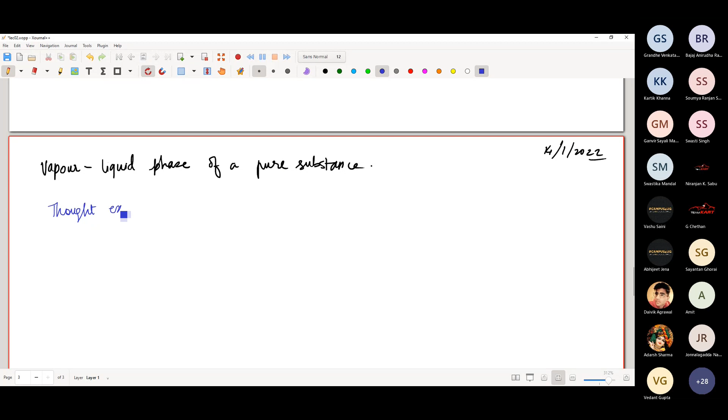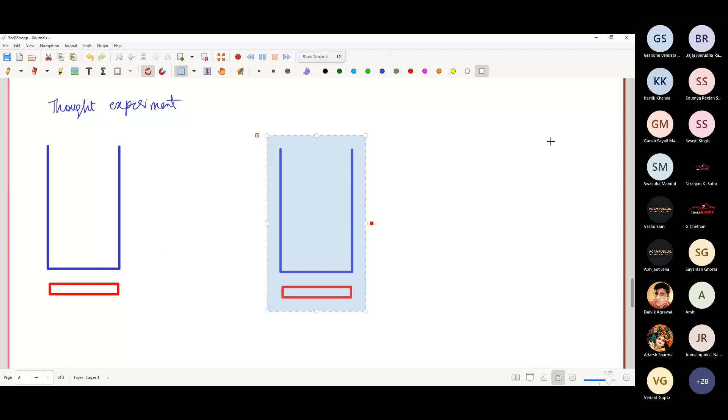All right. So the thought experiment. So let me redraw, or let me just grab hold of whatever was there. We just need the piston and cylinder. So let me grab hold of the piston and cylinder. Let me just drag it down. Just keep it ready over here. All right.

So you start off, let me just write down the states. So this is state 1, where you have water at 20 degrees Celsius. So you have water everywhere. Then you heat it. Okay. So when you heat it, you say that there is a sensible heat transfer. Sensible meaning you can sense the temperature of the water changing. And so you all know from elementary school that m Cp delta T is going to be equal to the amount of heat transferred. And that is true in this case as well.

So after heating, even when it reaches something less than the boiling point, there will be hardly any appreciable change in the volume. Slight change will be there in the volume, but nothing drastic. Okay, so after heating, suppose this is at 80 degrees Celsius. It has absorbed a certain amount of heat, and now the water is at 80 degrees Celsius. This initial volume and this volume presently will be different. This volume will be slightly larger. Why will the volume be slightly larger?

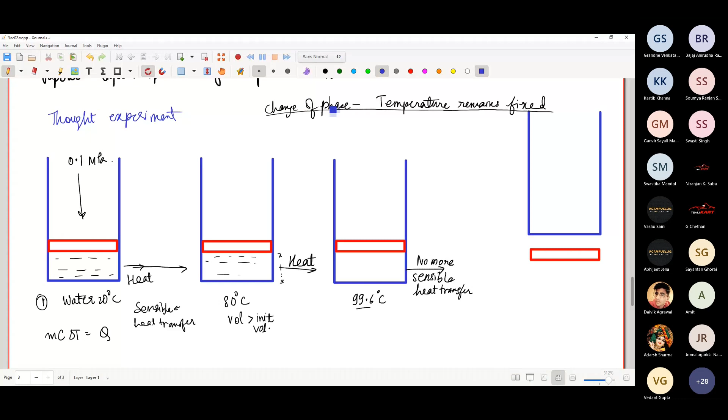This statement, is it always true? Sir, I think it will be true at the boiling point. No, that is okay. We are at the boiling point. At any phase transition, not just boiling, even for melting, this will be true. Even for sublimation, it will be true. Only for pure substance. Okay. It is true only for a pure substance.

For zeotropic mixtures or for mixtures in general, the temperature does not remain fixed. The temperature still keeps on increasing. Okay? The temperature still keeps on increasing with a different slope. I will just give you a brief idea about it later on. So there is no more sensible heat transfer. Now here it is still water. There is no vapor. So 100% water, 0% vapor.

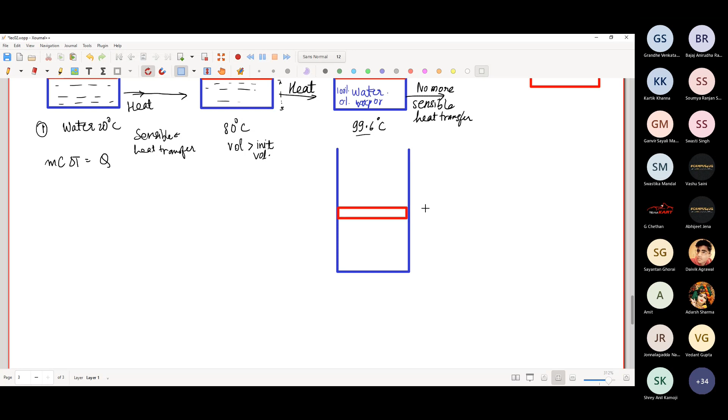Now any more heat transfer will cause what? It will cause some amount of vapor to be formed. And now the formation of vapor causes significant change in volume. Why? Because vapor has a much lower density than liquid. Rather, we say that vapor has a larger specific volume than liquid, and so any generation of vapor causes a larger change in volume.

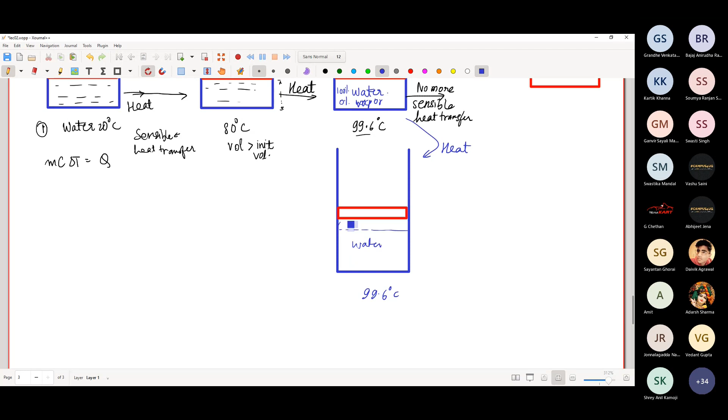So now say it is still at 99.6 degrees Celsius, still heating it. So you have water and you have some amount of vapor. You still heat it and it will stay at 99.6 degrees Celsius until what? Until the entire liquid water changes to vapor.

And so when the entire water changes to vapor, the volume will increase like this. So this is entirely vapor, but still the temperature will be 99.6 degrees Celsius. Now the last liquid drop has been converted into vapor. Now what happens when you heat? Now again the temperature will sensibly rise, meaning you are now superheating the vapor.

Okay. Any more heat addition will be tantamount to sensible heat transfer, and now you are raising the temperature of the vapor, meaning you are essentially superheating the vapor.

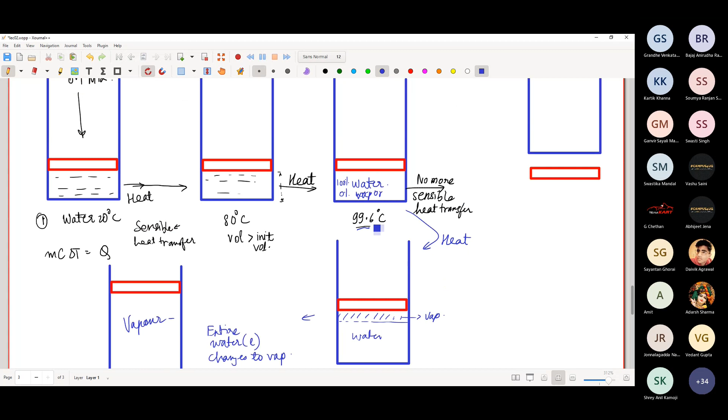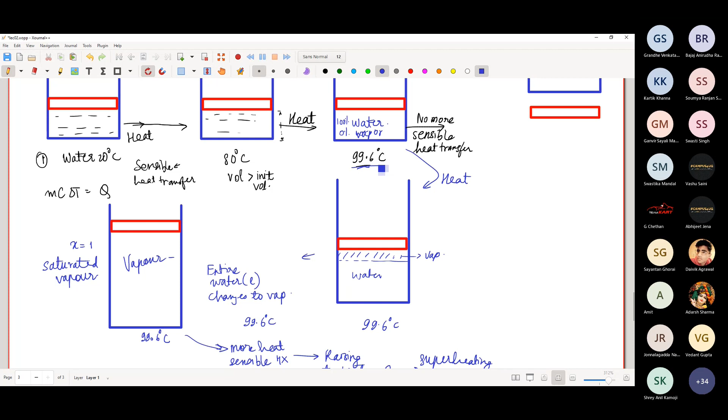All right, so this particular point, when you are at the boiling point and you have only water, is called x equal to 0 quality, and this is known as saturated liquid. And this point where you have 100% vapor is called saturated vapor. And so all the points at 99.6 degrees Celsius, that is at the boiling point, all the points throughout this process, are said to lie on the saturation curve.

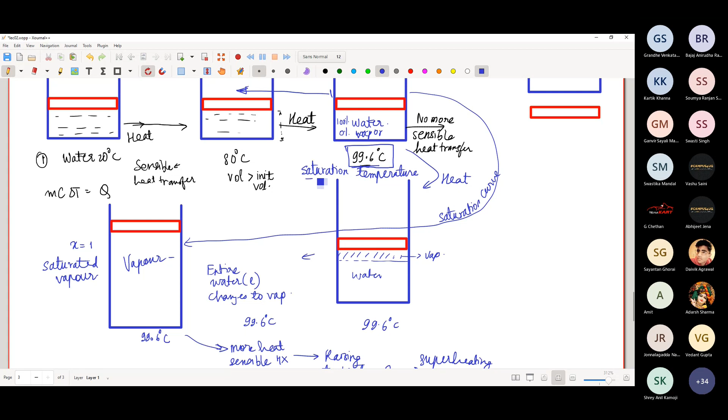Before this, we say that the water was subcooled because it is at a temperature lower than this temperature, and this temperature is correspondingly known as the saturation temperature. And this saturation temperature is at that particular pressure, and the pressure is 0.1 megapascal.

Okay, so let me redefine. So the quality X is equal to mass of vapor divided by mass of vapor plus mass of liquid. And this quality is only defined at saturation, meaning it does not make any sense for us to define the quality for fully vapor region, meaning if it is superheated vapor, then this does not make sense. It also does not make sense when you are a subcooled liquid. Any doubt so far?

So, can you not define X for superheated vapors? It will be only one, no? Yeah, so beyond that, it does not make sense. And we will come to why it does not make sense in a while. Because you have already specified it is superheated. Suppose someone says, tell me the quality of superheated steam. You should immediately say that since it is superheated, I know that it has gone beyond its saturation temperature. So it obviously is not in saturation anymore. So I should not define it.

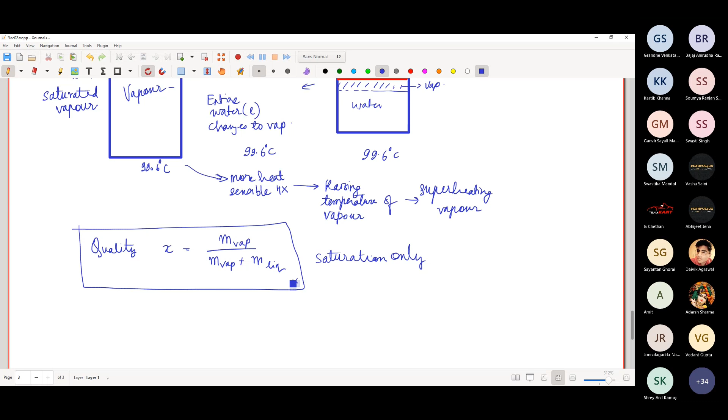It is obviously beyond a point where it was 1. But it is fully vapor now. So it simply does not make sense to define it. I'll come to that point in a while. Let me just draw the curves and I will exactly pinpoint why it is not necessary.

So now I would like to tell you this particular diagram that I had drawn, but I would like to fetch this particular diagram from EES. Okay, I don't want to hand draw it. I would like to fetch this particular diagram through EES. So let me do that. So let me share my entire screen. Let me know if it's visible. Yes, sir, it's visible.

So yeah, let me fire it up. I'll also work with the free version. If you have installed the free version, feel free to do it along with me. If not, it's recorded. You can do it at some other time. So you just fire it up. You get a window like this. It says it expires sometime. Okay, anyway.

Yeah, okay. So let's create a new file. Let me just increase the size of the font. Let's go to preferences, increase the size of the font. Okay. So first, because we are not bothered with anything, we'll just go to property plot. Inside plots, there is property plot. You click on property plot. You go to Steam. All right.

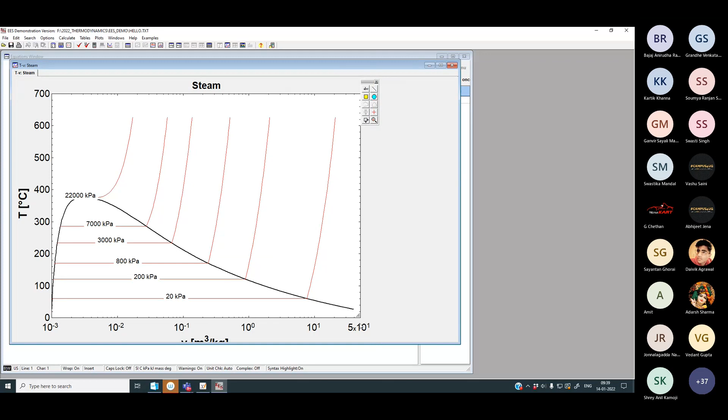So what I will do is I'll take a screenshot of this and then we can discuss it. So what was the shortcut? Control Shift Print Screen, was it? No. Was it Control Alt Print Screen? Nope. I'm just typing. Okay. Yeah.

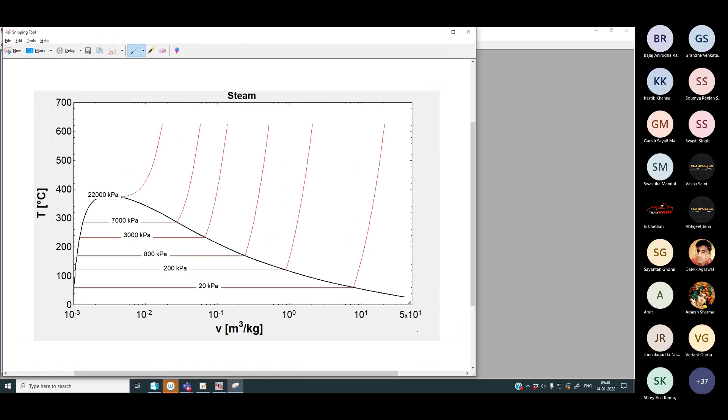My home PC does not have an SSD, so you have to bear with it. Right. So let me paste it over here. Very good. Just a moment.

So what do we see in the TV diagram? So this is overlaid on the top. So this actually goes like this. So what do you call this point? This point is known as the critical point. Very good.

And this black curve is known as the saturated liquid line. Okay, saturated liquid line. And this black curve over here is known as the saturated vapor line. I mean, we call it line, but it's more of a curve. So if I were to draw it in pink, you're drawing temperature versus volume.

Below this, what was happening is you had water somewhere over here. Now you're heating the water. Now think back to what I just mentioned a few minutes earlier. When you heat water, the temperature increases, but the volume does not increase a lot. But we are in the log scale. Look, on the x-axis, we have a log scale. So this will look something like this. Okay? The slope of the curve is such that the volume change is not that high.

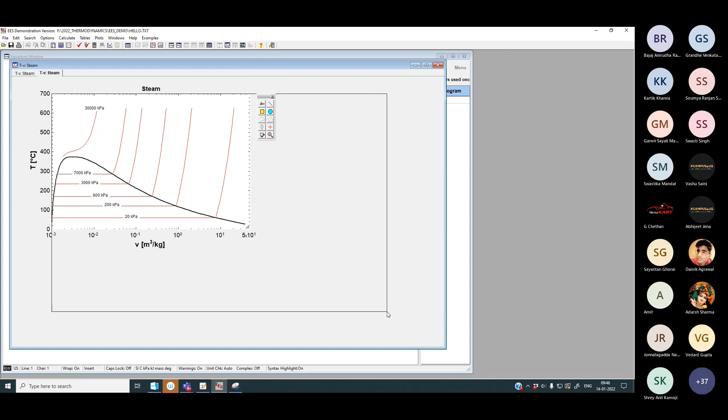So you see the 30 megapascal line, it will never go into the dome. Do you see the point? Meaning it will go from liquid water to vapor without actually going through this. So there is no demarcation between liquid and vapor at that point. That is why we say that we are beyond a critical point. Okay.

So here, the discontinuation, what does it mean, sir? The database does not have the data to plot it. No other interpretation should be made of it. But in reality, it comes like this. I mean, it tries to go parallel to this curve over here, this black envelope.

So is that vapor or water? Like what state is it in? It's difficult to understand. You don't call it, you just call it steam. At such a high pressure, even if you have water, you call it steam. Rather, you call it supercritical steam. Okay, sir. You will not be able to make the distinction whether it is liquid or gas or what it is. And supercritical substances are quite important.

In fact, we have a project running on supercritical carbon dioxide. So whenever you can hop down to the lab, I can show you the apparatus. It's quite grand. Okay. All right. So this takes care of this.

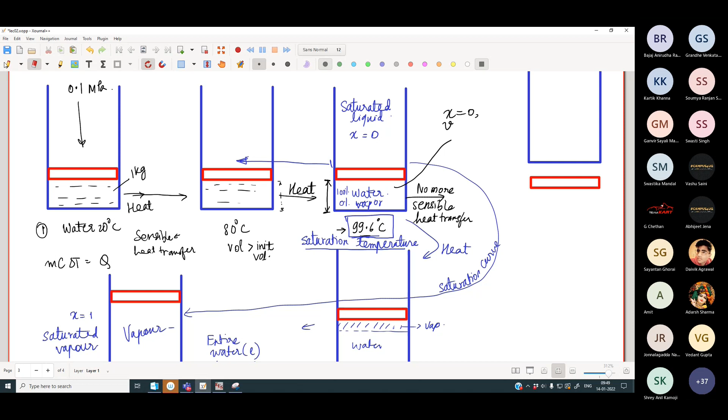You started off with 1 kilogram of water. Now, because you can calculate this volume, you will now know what is the specific volume at x equal to 0. At x equal to 0, the specific volume, we call it VL. That is the specific volume at saturation. Customarily in Sonntag, they use Vf, that is fluid. Now, at this point, when x equal to 1, also you can figure out the volume. So you will be able to find out Vg, that is the specific volume of saturated vapor.

Now, how do you go about finding out the specific volumes of everything in between? So follow closely the chain of logic. Basically, anywhere inside the dome, you are interested to find out the specific volume. So the logic is the total volume occupied in the piston cylinder arrangement is because of the volume of the liquid plus the volume of the vapor. So in Sonntag's notation, we can write this as Vf plus Vg.

Now, according to the definition of specific volume, v is equal to the total volume over mass. So I can write the specific volume of the fluid is equal to the volume occupied by the fluid divided by the mass of the fluid, and similarly the specific volume of the gas will be the volume occupied by the gas divided by the mass of the gas. So if I make this substitution, total volume is specific volume times the mass. So it is vf times Mf plus vg times Mg. Okay, this is the total volume.

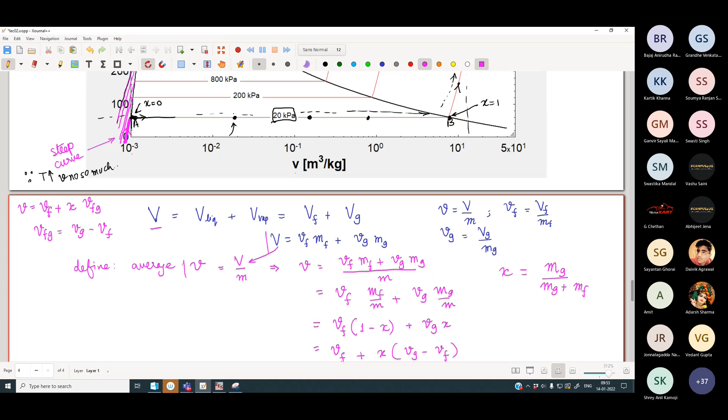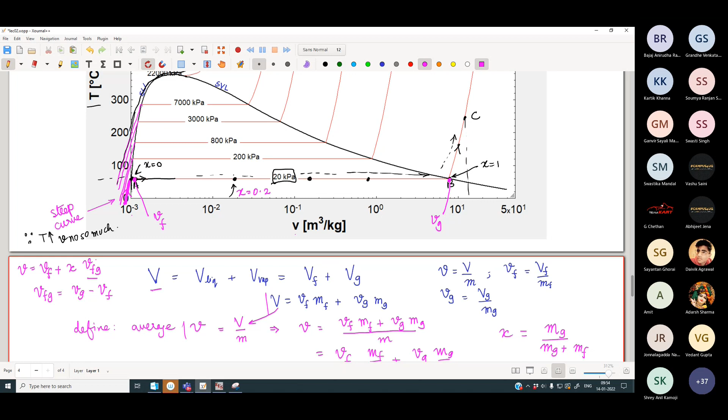So at this point, suppose x is equal to 0.2, I just need the v at A, meaning vf. I will just need the v at B, meaning vg, and I simply first find out vfg, that is the difference in the specific volume between saturated vapor and saturated liquid, right? And I will simply multiply it by the quality and add it to vf. So it's literally like a linear interpolation. Is it okay? Yes, sir. So far we have not done something very sacrosanct. Okay, so let's proceed.

So you can alternately also draw this on a, might be a bit difficult for you to visualize at this junction, but it's not super difficult. So we will try to draw the pressure temperature diagram for such a fluid. Let me first draw the diagram and then we will discuss the specifics. It looks like a Y, and after a point you reach the critical point and there is nothing. Okay, so this is the solid phase.

There is the liquid phase. Oh, sorry, the liquid is this one. So going with an isobaric process at low pressure, an isobaric process. How does an isobaric process look in the PT diagram? It looks like a horizontal straight line.

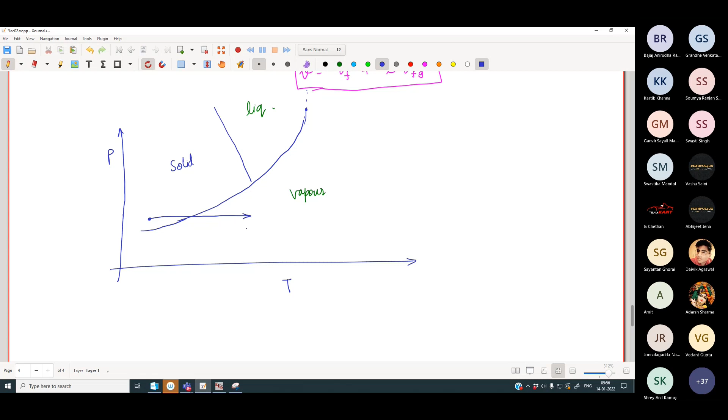So if the pressure is low enough, you will simply go from solid phase to vapor phase. You have to use all the terms correctly. This particular process is known as sublimation, right? And so this curve is called the sublimation curve.

If you go at a high enough pressure, if you keep adding heat isobarically, meaning the same piston cylinder arrangement, what will happen? You go from being solid to first a liquid, then from liquid you transition into vapor and so on. Okay.

So this sublimation, can it be done for any pure substance or very few? It can be done for any pure substance. This curve exists for any pure substance. This is not just specific for water. But can you give a range for how much less pressure we need for water? Like water can't be directly evaporated. Okay, we'll have to look at the properties. I don't recall the properties. We can figure them out.

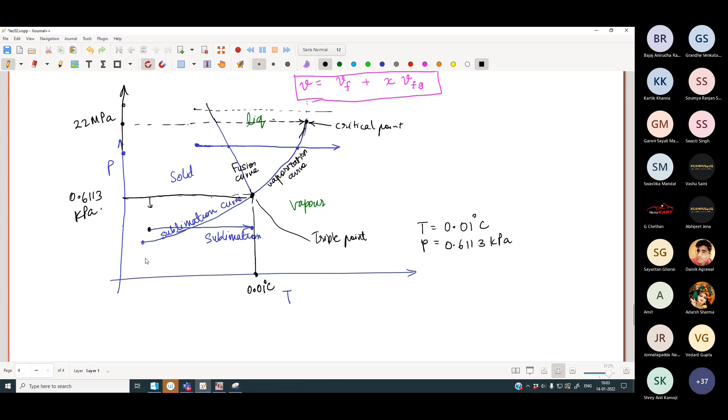So now let us try to make it a bit more complex. Let us do the complexification first, and then we will come to the independent properties. Let us try to draw it, just the single branch, and see what happens. Wait, am I at the end of the page? No. Let me just zoom out a bit.

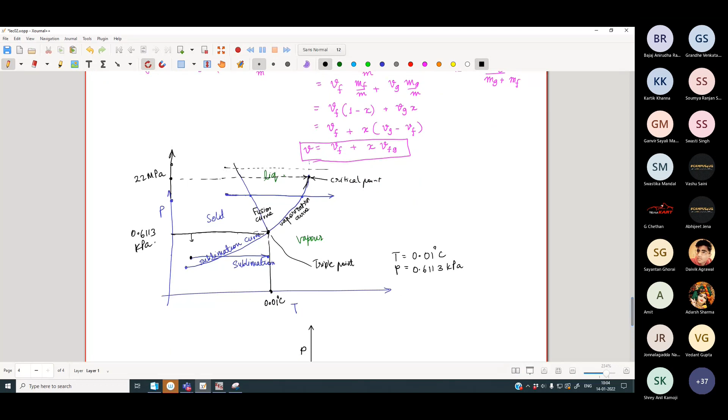So what do we have? We will have P, T, V. On the third axis, we have the volume. And so let me first draw the projection on the PT plane, and then we will see actually in the third axis how it should have looked. So let us just focus on this vaporization curve for now. Let us focus only on the vaporization curve for now.

You must realize that this is just the projection that you're seeing on the PT plane. This curve is not actually flat. This is the critical point. You agree with me on this? This is not the actual curve. This is just the projection you see because we plotted the same on the PT curve, meaning you're looking along the V-axis onto the PT plane. First of all, this much is it clear? Yes, sir. Okay.

Now, let us see what happens. So, when we looked at the projection in the TV plane, what did we see? In the TV plane, we saw this entire dome business going on, right? So, this critical point, I mean, so in the TV plane, we had something like this. This is the projection. This is again the projection of something. And at a given pressure, we had curves.

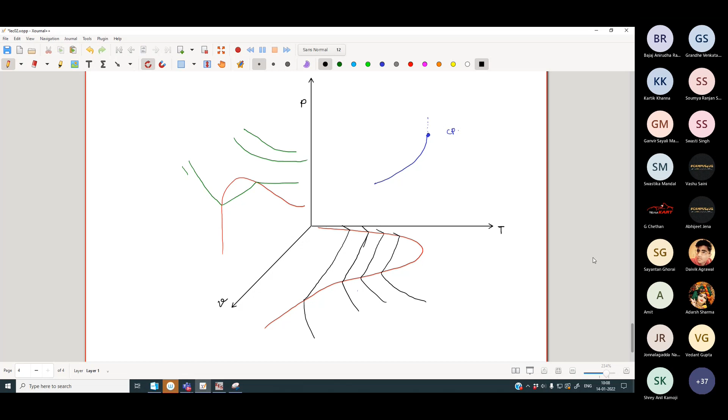How will they look? Okay, let me just... I mean, this much is clear, right? This logic is clear. So let me now draw another diagram. Someone has done it way back because someone had that much intuition and grasp. So basically, you have a dome like this. You have pressure, volume, temperature, and how do I justify? Hang on, it's easier to discuss the surface directly. Either it has to be drawn with the help of a PC or it's simply horrendous to even try to do it.

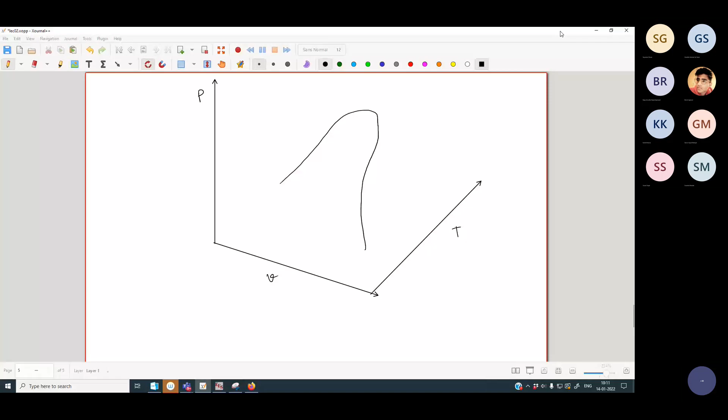We will search for PVT surface of water. Okay, there it is. Is your screen shared? No, I'm looking for the thing. I found a very nice image. One moment. I will bring it to the desktop and again show you. Don't worry. Okay.

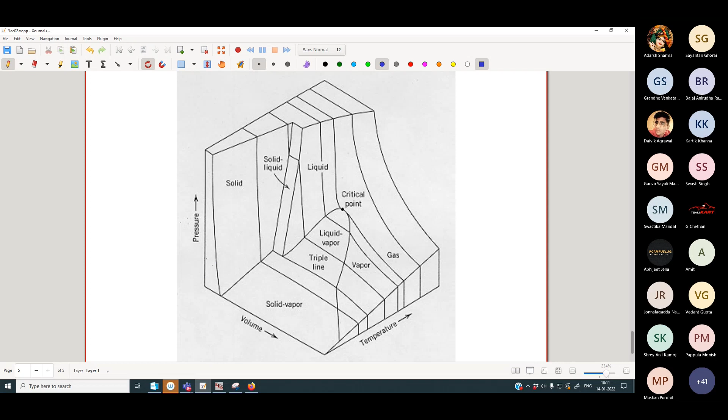So on the z-axis you have the pressure, on the x-axis you have the volume, and on the y-axis you have the temperature. So if you take a slice at a certain pressure, so how do you get the VT plot for different pressures? How do you get the TV diagram for different pressures? So this is at one pressure, this is at another pressure, this is at a higher pressure. Compress it axially downwards? No, you just take a bunch of slice cuts. In which direction? The plane should be parallel to the VT plane, volume temperature. That's it.

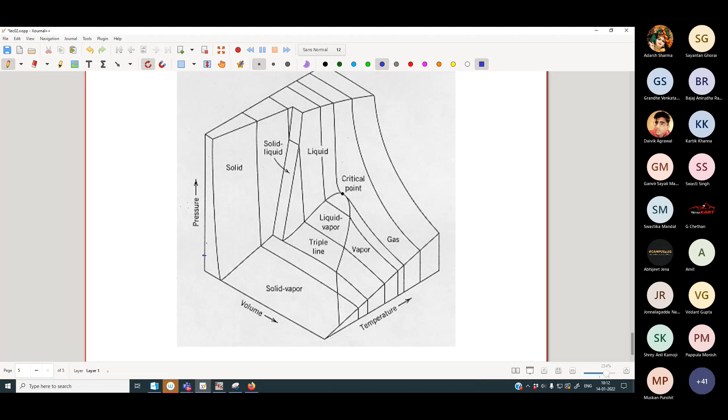See, suppose this pressure is at 20 kilopascal. Meaning, if I stay parallel, wherever this surface is now cutting this 20 kilopascal line will give me the appropriate diagram. Is it okay? So wherever this plane intersects this surface, for example, it is intersecting here. It will intersect like this. You see my point, right? It will be like this, then this.

We are looking at it in the TV direction. Okay. Anyway, it will be like this. So you just need to find out the intersections of this surface with the isobar. So suppose you now want to know how it looks for 100 kilopascal. You just select 100 kilopascal, draw a plane parallel to the VT plane through this 100 kilopascal, and you will be able to find the

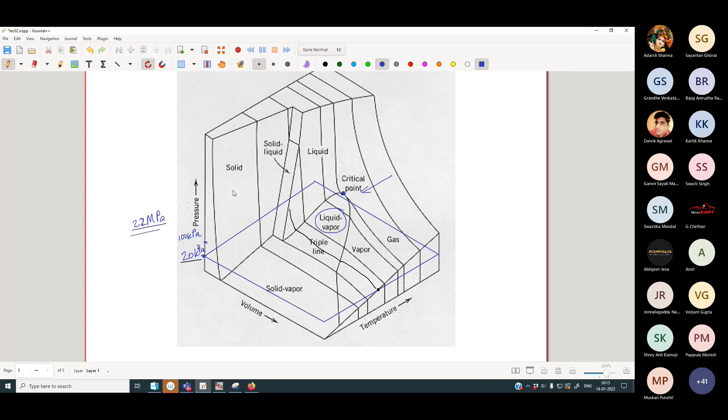But even what Venkat said, that you squish them to get this, that is also correct. Looking at it from the axis perpendicular to the p-axis, you're simply squishing everything down. But each of these curves are basically from intersections of the p equal to constant plane with the surface. Okay, you have this surface that is marked over here. Let me just get a colorful one. Hopefully this.

So you have the light pink surface, and you just sort of take intersections of a surface. So what is an isobar in all of this? What is an isobar? A plane parallel to VT. So when you just take a slice cut of that isobar with this entire surface, you will get those curves that we're talking about.

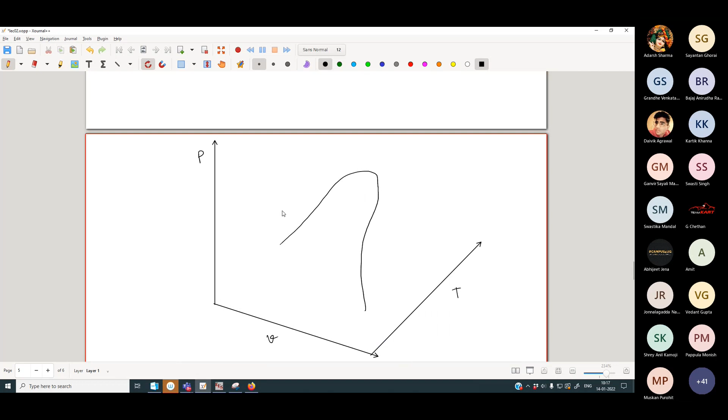Okay. At a certain critical point, you will not be able to intersect the vapor-liquid dome anymore, and then you will not have the curve. Anyway, for our purpose, this discussion itself was a bit too much. We did not need to discuss this. Our discussion could have been restricted to only this point. But still, I just wanted to show you how they look. In hindsight, maybe not such a good idea.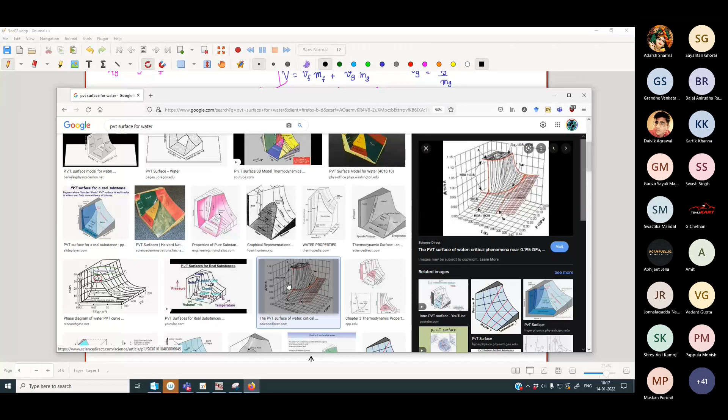People have even tried to do it. I mean, they get an A for their effort. In EES, is there no facility for a 3D plot? No, no, EES does not do 3D plots. It's not meant to be used that way. Okay.

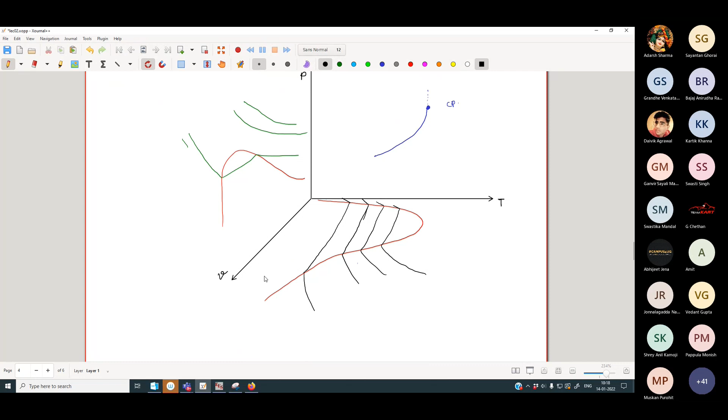So now we will move on to determination of properties. But before that, independent properties. Independent properties of a pure substance.

Someone is saying something on chat. Okay, someone has done it in 3D, have they? Let's see. Is it available for free? Okay, there you go. Is this for 3D printing? Ah, okay. In fact, I'll 3D print this today itself if I get the chance.

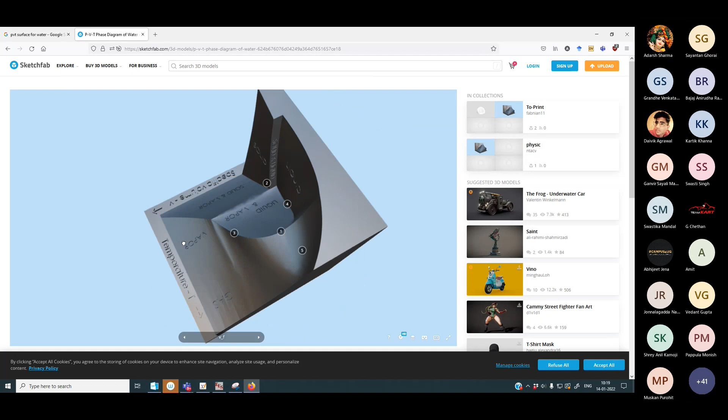So look at this. We are bothering more about the liquid and vapor. Are you able to see the screen? Yes, sir. So you are now focusing on the liquid plus vapor. You have liquid, liquid-vapor and vapor. And now imagine you're looking at the curve like this. So what do you see?

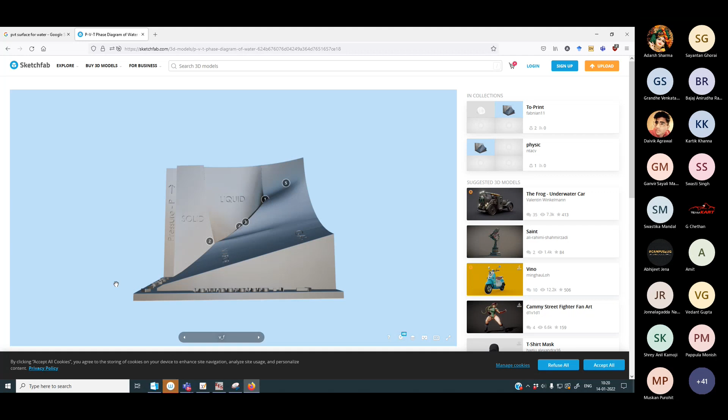Can I change the lighting of this? Textures? No. If I were to change the lighting, things would become much better. But is this an STL file? Don't know, sir. I just searched it on Google and found it. Can I download it? No, I have to log in to download. Okay. But wait, if it's there on Thingiverse... we're putting a lot of effort into just visualizing it, but anyway, I don't know whether you're able to see this solid or not.

There's a solid, liquid, and gas. So this surface you see on the projection. So now we are looking at the PT diagram. Okay, this is now the PT diagram, and you have the solid to vapor curve, which is the sublimation curve. This is the sublimation curve.

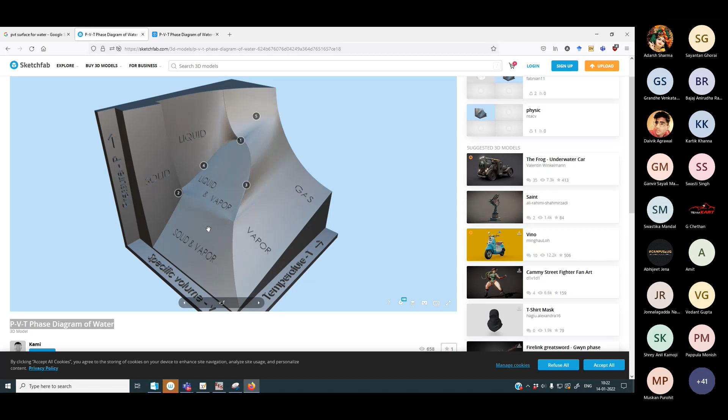Now, if I were to look at it in the TV diagram, you have liquid, then transition from liquid vapor, and then gas, up until you reach point 1. So now we are looking at this slice.

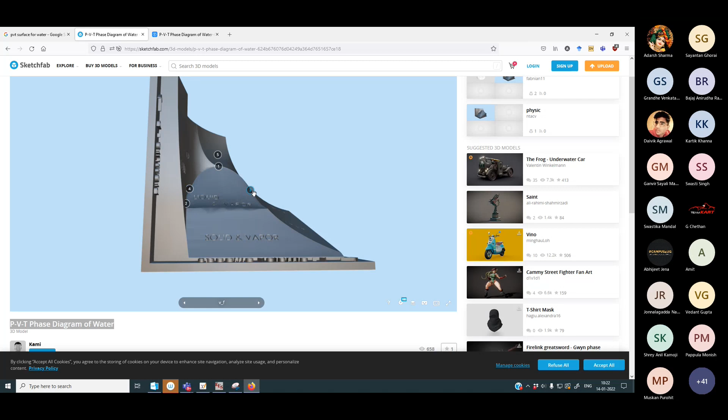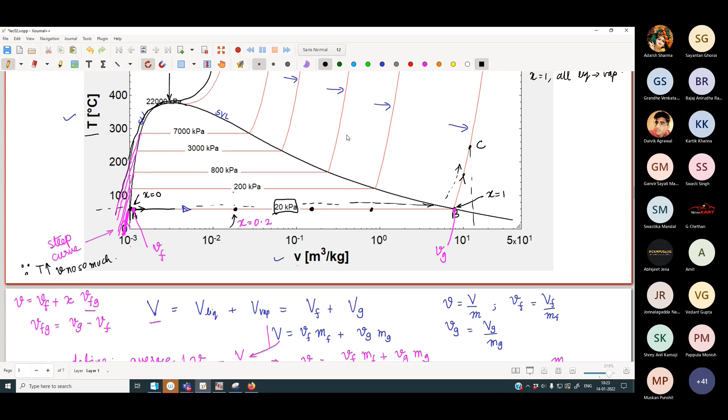Suppose you're fixing yourself on this pressure where 4 and 3 are, then what happens? You take a slice along this plane, which encompasses points 3 and 4, and you get a curve like this. So 3 and 4 will give you this straight line. And this curve that you see is the intersection of this plane with the surface. Is it okay?

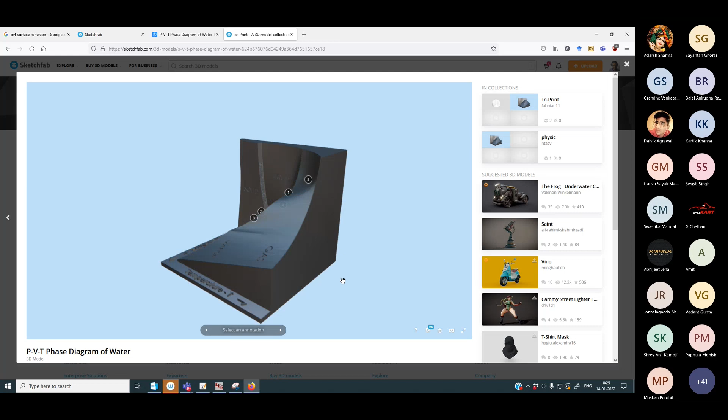Man, I really wanted the STL file. Wait, we will look at this. Does anyone have a Sketchfab account? Where's the download button? Sir, in the model information, it is mentioned it is an STL file. Yeah, but I need to log in, do I? I'll just log in with my Facebook. Does anyone know where you download this from? I can't seem to find it. Or do I need to buy this? Okay, I don't have it.

But anyway, if someone gets the STL sometime, if you take a cut, you will get that upward rising slope, because there's an upward rising slope like this. If you're good in engineering drawing, you will be able to get it.

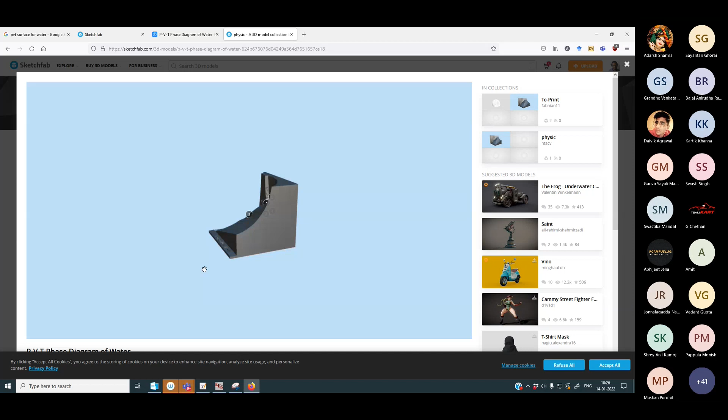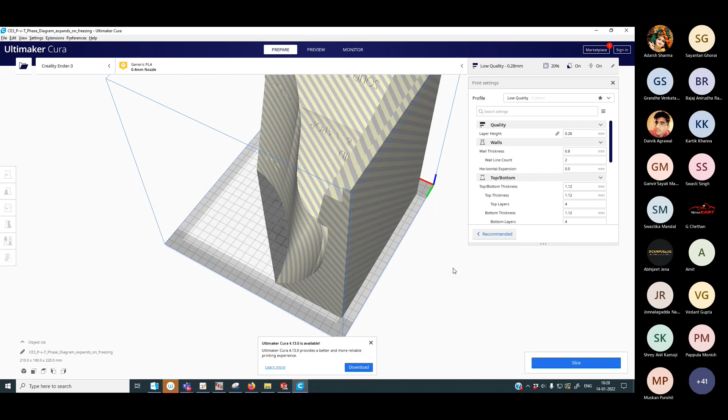Venkat, how do you download from this? Sir, I found another site and I put it in chat. A free download is available on Thingiverse. So we just need the STL file. We have enough time in the course; it is worth our time to look into this. I think it may be okay in Cura. We'll simply slice it and then we have the vertical slices. It's a big model, so let's scale it down. Let's rotate it, slice it, and preview it.

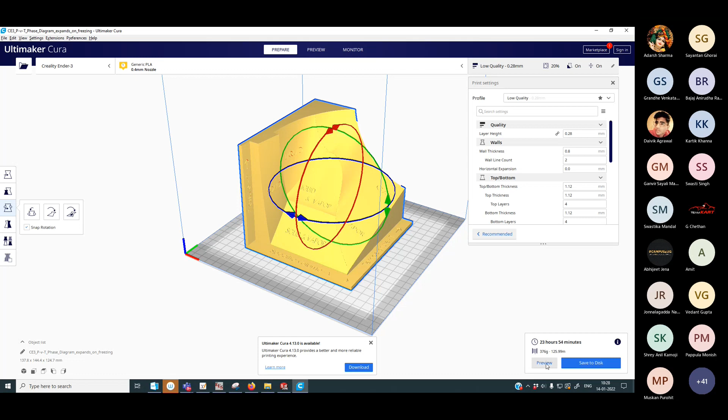All right, so now we're taking the vertical slice. Now look at this curve. You're coming from liquid to the saturation point, then you're holding it, and then you go to this curve. Now, are you convinced? Yes. You're going from liquid to the saturation point, then you're in the liquid and vapor zone. So you go straight, and then you're in the vapor zone.

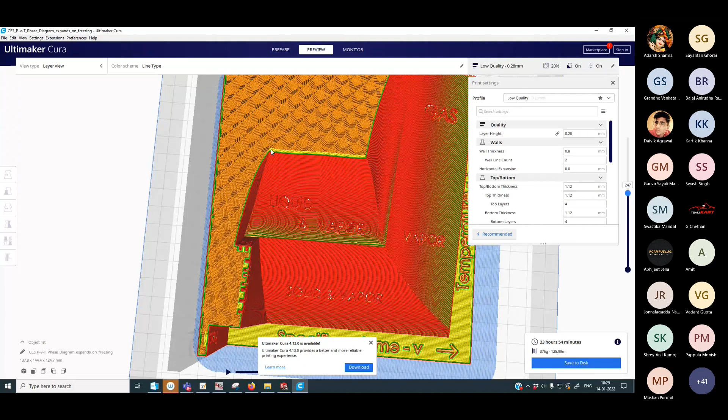And now, if I go to a higher pressure, you see how the dome is shifting up? Subcooled liquid to saturated liquid, then you're inside the dome, and then you go to superheated vapor. If I keep on increasing the pressure, what will happen at a certain point? The two curves have merged, and there is no more distinction because you are now beyond the critical point. Is everyone convinced now? Yes, sir.

Okay, that was a lot of work, but thanks a lot.

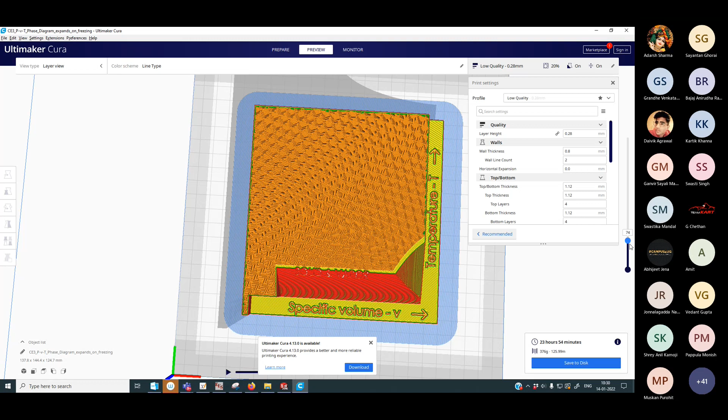So now you have this sublimation curve. You go from solid to solid plus vapor, so there is an equilibrium between solid and vapor also. And then you go to superheated vapor. Now you might be thinking, this diagram is only for steam, meaning when the temperature reduces, when you go from liquid to solid. Why was I able to say that it is for steam?

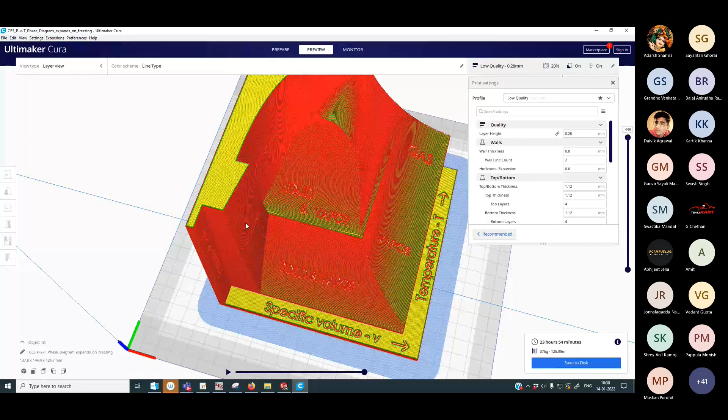In this axis you have the temperature. You have liquid over here and you have solid over here. When the temperature reduces, when you're going from liquid to solid, what has happened to the volume? What has happened to the volume?

When you're simply reducing the temperature, you're going from liquid to solid, right? Yes, sir. There is a slight increase in volume in between. So that increase in volume is because of the anomalous property of water. Anomalous expansion. Yes. So that is how I could say that this diagram is made only for water. Okay.

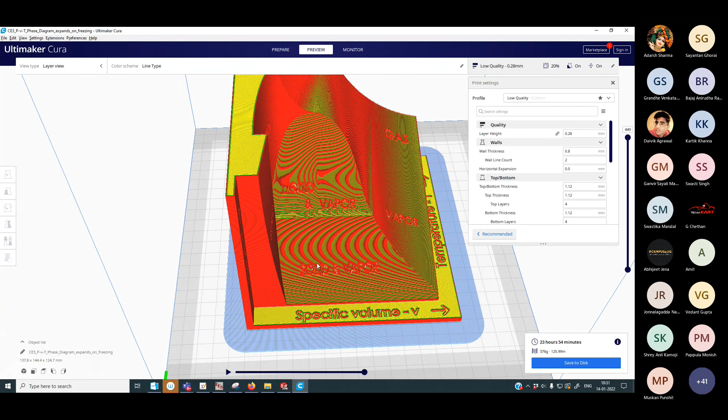But for any other material which contracts on cooling, this wedge that has now come to this side, this wedge, okay, it would actually go on the inner side, nothing else. All right. Yes. No, I want to hear it from everyone. I mean, it's just that this wedge would go inside because the volume would reduce as the temperature is reducing, as you're making that phase transition, nothing else.

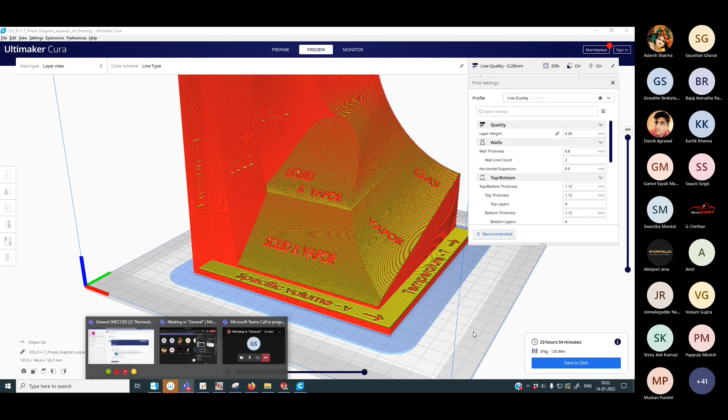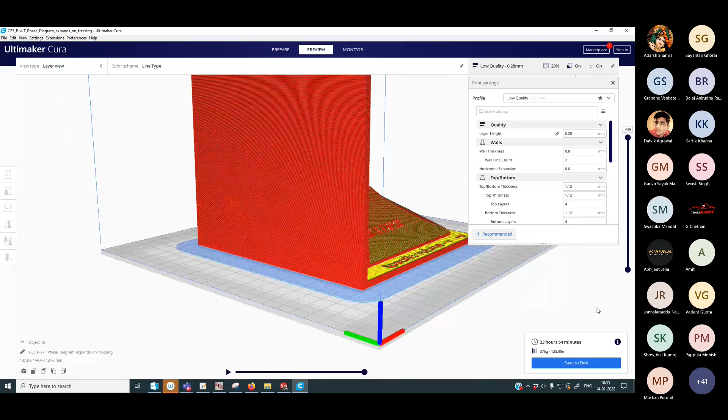Get your calculators ready. But what I will try to do is break this STL into multiple layers, like 3 layers. One for this, one for this, one for critical. I will try to make it stackable. This would be a good addition as a teaching tool. This is fantastic. 3D printing, yeah.

You could also do it in SolidWorks. In SolidWorks, you just import this guy. It should be, in fact, better visualized in SolidWorks. Let's see. So you have this. Very good. So now, how do you make that plane cut? I think it is in features. No, not in features. Evaluate. It's definitely not in evaluate. Anyone know how to do that cross section? Is it this one? Yeah, it's this one.

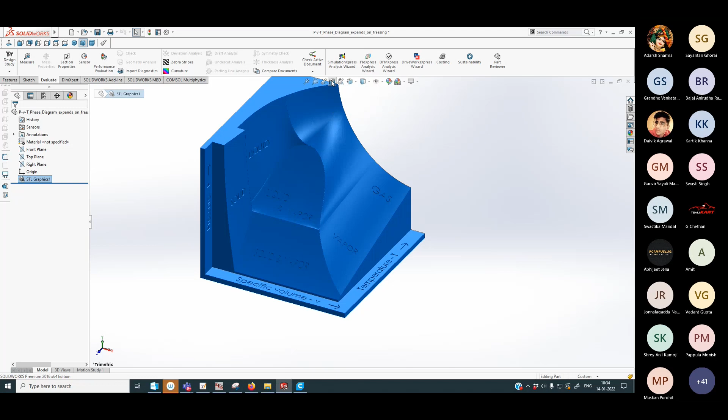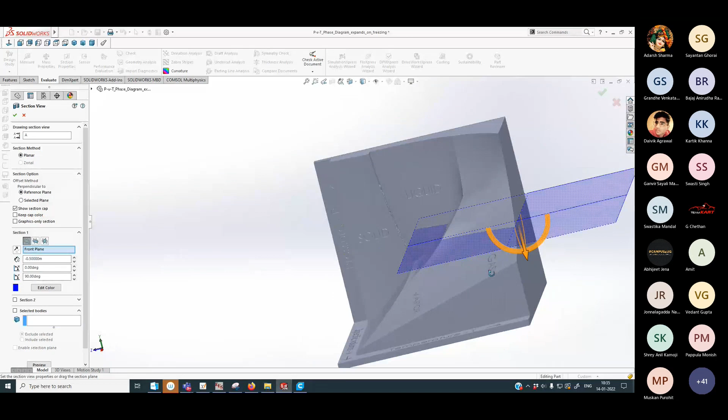So I will simply rotate this. I will make this 90 degree. And I will make this. How do I offset it? Someone needs to help me out over here. You go for the reference plane and how do you move this along? You don't move it along, is it? Let's preview it. Oh, damn it.

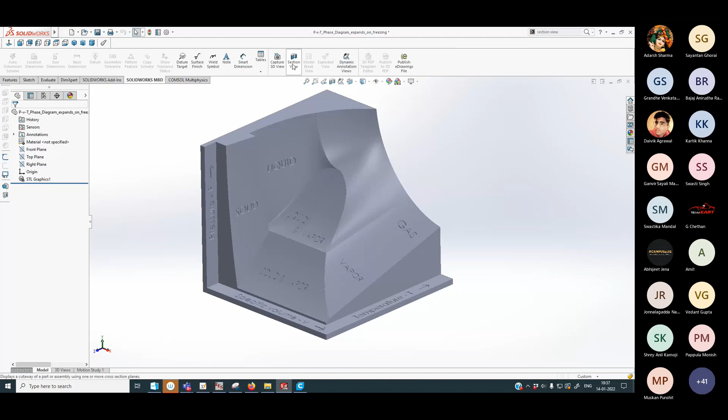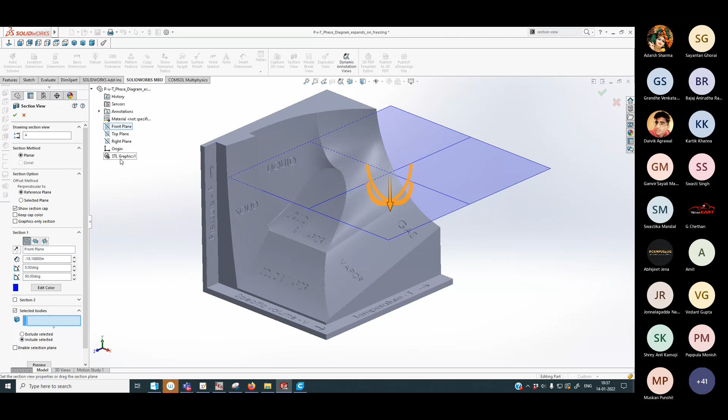Oh, I don't know. Does anyone know how to do this? This is how it should have been. No, I don't remember. It is there. That much I get. But oh, selected bodies. I need to select this body. It's not selecting. Okay. Yeah, the STL. It's not. If I were to select this, then it should have been fine. Anyway, that's a glitch. Who knows? So, crash that.

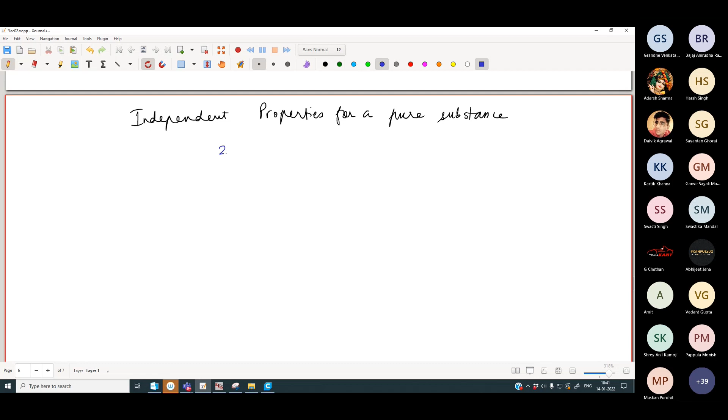So for a pure substance, you need two independent properties to specify its state completely. Okay, so in the TV diagram, suppose someone were to ask what are the two independent properties over here? Obviously, I can say it is some temperature and some specific volume, or I can say it is some temperature and some pressure also. Why? Because this temperature is unique and this isobar is also unique. Remember that in the TV diagram, this is the isobar. This is how the isobar looks in a TV diagram.

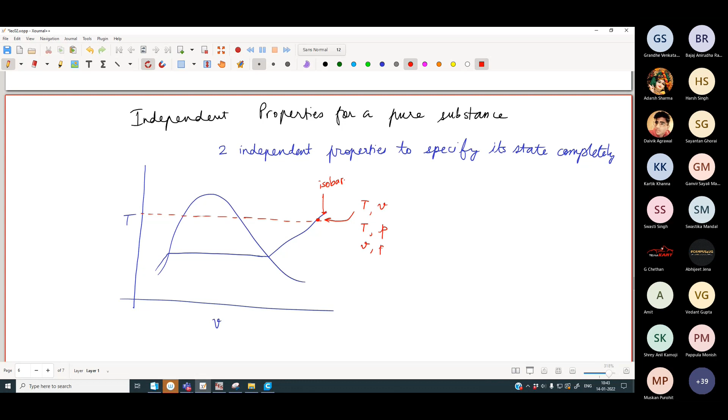Okay, or I could specify the V and P also, because this is unique. Similarly, in the subcooled region, so this is true for the superheated. There are other properties also, we'll get to them later. In the subcooled region, you can also specify any of the three combinations, TV, TP, VP, it will all work. But what about inside the dome? See, this is the isobar. Now, inside the dome, the temperature is fixed and the temperature is Tsat. The pressure is also fixed because the pressure is the isobar. So I will call it Psat.

Now, given a certain isobar, listen to this very carefully, given a certain pressure, I automatically fix what my saturation temperature will be. And what is that saturation temperature? In this particular case, it is nothing but the boiling point of that pure substance.

This temperature is nothing but the boiling point. Is that clear? So given some pressure, automatically T boiling is fixed, meaning Tsat is fixed. So how do I know where I am inside this dome? I do not know. I could be here, I could be here, anywhere. So what helps me to specify that additional?

Now, first of all, do I even have it with me? Let me just look it up. Okay, it's gonna do an index search now. But most likely. Okay, so I have exactly the 6th edition, which is good.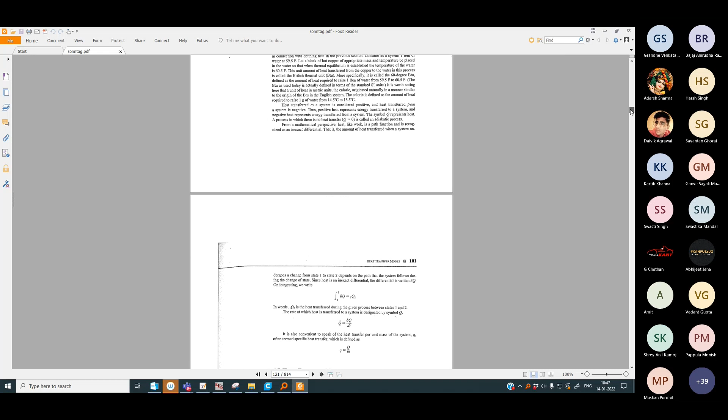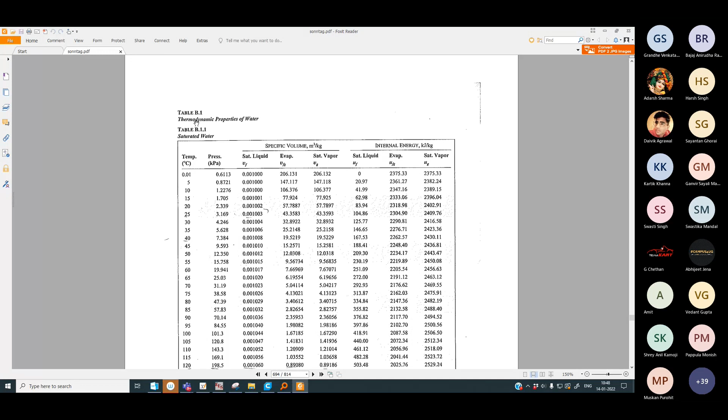So now if we go to the tables, we have now reached Appendix B, which says Thermodynamic Tables. So let us see, what do we have? Table B.1, Thermodynamic Properties of Water, Saturated Water. Under saturated water, you have a whole lot of temperatures, a whole lot of pressures, a whole lot of saturated liquid specific volumes. So these three are saturated properties. So let me take a screenshot and we can discuss it over there.

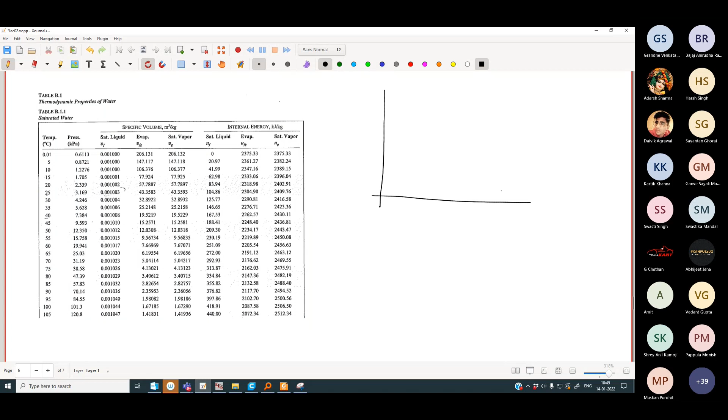Okay. So what do we have? For saturated water, what are we looking at basically? You're looking at this curve. You're looking at the saturated water tables, and so you're looking at this curve inside. Okay, so here you have two kinds of tabulations and I will go through them. The first kind of tabulation, this particular B.1.1, is increments of temperature. Meaning temperature is jumped by 5 degrees at a time and correspondingly all the properties are marked.

So if I were to graphically depict it, suppose this red line is this 5 degrees Celsius line, right? So the next entry, 10 degrees Celsius, would be over here. Then the next entry would be over here, and so on. Okay, just trying to give you a broad idea of how the lines actually look. And so corresponding to this, what are the properties that I have? So at 5 degrees Celsius, it tells me that the saturation pressure corresponds to 0.8721 kilopascal.

Meaning, what does it mean when it tells me that at 5 degrees Celsius, the pressure is this? How do I graphically depict it in the TV diagram? The red line will be at 0.8721 pressure. Yes. So this isobar is 0.8721 kilopascal. And if I were to draw the entire isobar, it would look something like this. Do you agree? Yes, sir. Good.

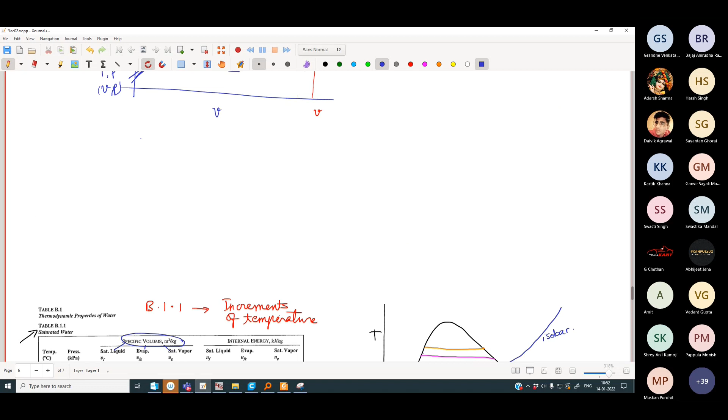At point b, V is equal to 147.118. Alright? And it additionally gives you the VFG value, which is simply Vg minus Vf. This is the difference between this and this. Why have I tabulated it? Because we have seen that in order to find out the property at any internal point, you simply can take this value, add it to VFG times the quality using this formula that we have written now.

Okay, that is why the people have already tabulated it for you. You don't need to do that extra step. To the right of specific volume is internal energy, which we don't need to worry about right now because we have not yet covered that.

But you can see they are having a similar tabulation. You have internal energy of the fluid, that is internal energy at point A. You have internal energy of the vapor, which is internal energy of point B, and you have the difference between the internal energies, UFG, which is UG minus UF. Any doubt in this so far?

No, sir. Sir, excuse me, sir. Yes. Sir, the graph which you have drawn, is it specific volume or volume? Specific volume. There will be no absolute quantities over here. Okay, yes.

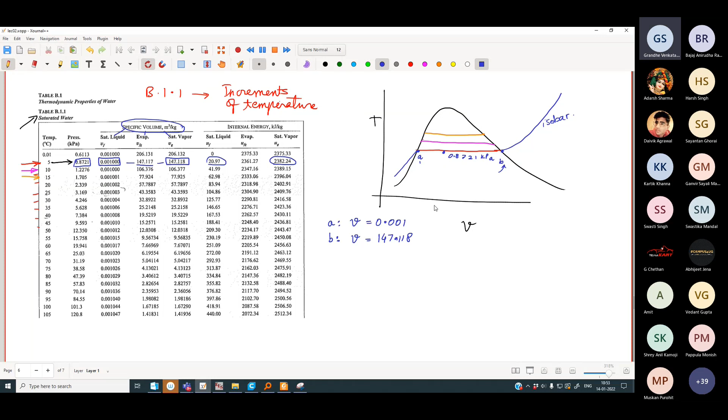Okay, so let me go back to the PDF. So this table keeps on going. You reach very high temperatures and you keep going until where? Okay, so this particular page, if you actually have the Sonntag in front of you, this page will tell you at these temperatures and pressures, this is specific volume, internal energy. The next page is actually enthalpy and entropy, but at those same temperatures and pressures.

I mean, are you able to understand what is going on? The left page is this and the right page is this. So in a single open of a book, you will be able to get the properties of specific volume, internal energy, enthalpy and entropy. Let me try to show it in an actual physical book how it looks like.

Yeah, am I visible? Yes, sir. Is the book visible or not? So there is more brightness. There is more brightness. Yes, sir. It's visible. Yes, sir.

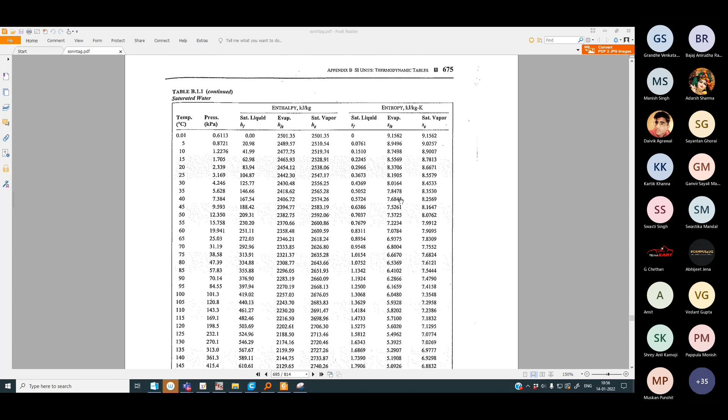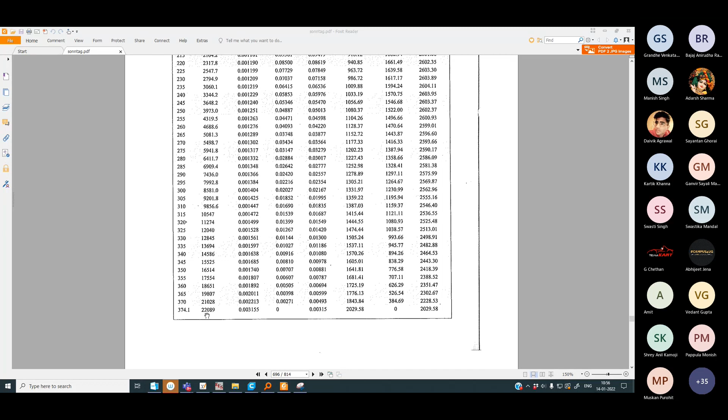So if you can focus your attention on the screen again, you will see that you will go up to a pressure of almost 22.089 megapascal. You're increasing the temperature slowly; at 374.1 degrees Celsius, which corresponds to an isobar of 22.08 megapascal, you have the critical point. Okay, so you have all the four properties.

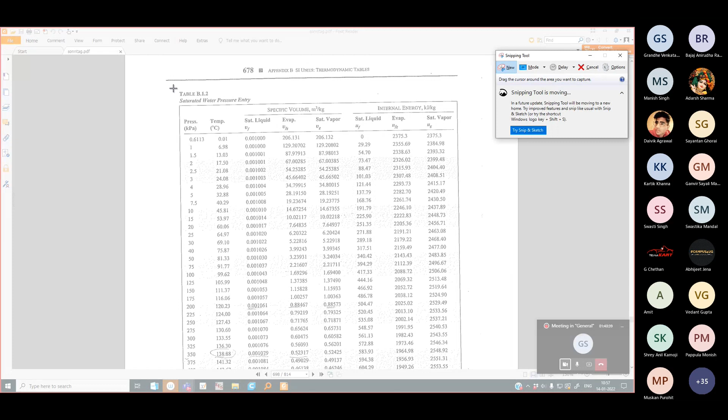Now you have saturated water with pressure entries. That was saturated water with temperature entries. What is the difference between the two? In this, instead of temperature being stepped by a fixed amount, you are now stepping through pressure in a fixed amount. So let me take a screenshot. Let me grab hold of this. Where is it?

So like I said, there are two kinds of entries. In the previous entry, temperature was incremented by fixed amounts and everything else was tabulated accordingly. But now pressure is incremented by fixed amounts and everything else is tabulated accordingly. Is the difference between the two clear first of all? Yes, sir.

So you can now draw the PV diagram. We had drawn the TV diagram, but now you can draw the PV diagram. And how does the PV diagram look like? So isotherms in the PV diagram, they look like this.

So now, if you look at say 50 kilopascal, suppose this is 50 kilopascal. This is fixed and it corresponds to a saturation temperature of 81.33 degrees Celsius. So it means that this particular isotherm is 81.33 degrees Celsius. Is it okay? Yes, sir. There's nothing difficult about it. So yeah, that's how it looks like.

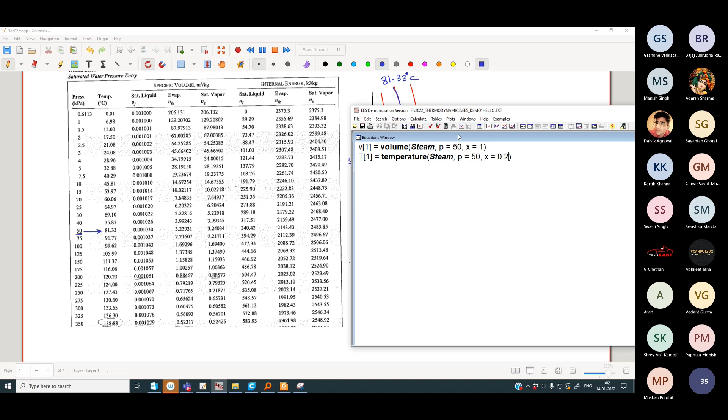Will the temperature change? So volume changes. Temperature is constant, sir. Very good, because we are inside the dome. And inside the dome, regardless of the quality, the temperature and pressure stay fixed. Yes? The volume will change, you're correct. But anyway, we just wanted to fetch the property. So you can let it stay like this.

So then we go to plots, property plot, we go to steam, TV diagram. We don't want to include any isobars except maybe at 50 kilopascal. Okay, we click on OK. We get this curve. Then we go to plots, then overlay plot. On the x-axis we have the specific volume, on the y-axis we have the temperature. We will mark with a solid marker. Click on OK now. So you get the point over here.

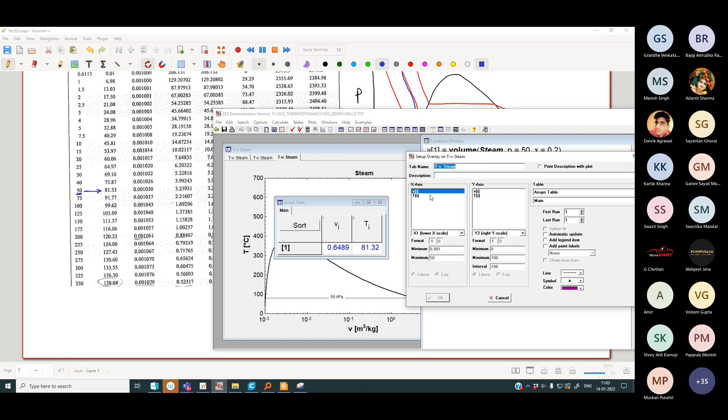Okay, so basically in the program, I have put the volume and temperature in arrays, and I'm simply plotting the array points, nothing else. More on this throughout the course. I can make this 0.2. Let me run it so that the array values are updated. I will go to plots, overlay plot. On the x-axis, we have the volume. On the y-axis, we have the temperature. So this is the point where the quality is 0.2.

Okay, so you can see that there are big leaps in quality when you're going in the log scale. You would expect this to be at a higher quality, but this is just 0.2. Why is that? Because it's in log scale. So in the same plot, they also ask, should I also plot lines of constant quality? If I say yes, look at this particular line, are you able to see it?

This particular gray curve is the line of iso quality 0.05. This particular line is the line of iso quality 0.1. This line is iso quality 0.2. This line is iso quality 0.5. Is it okay? Yes, sir.

So where can we find the tutorial of using this EES platform, like the syntax, all those things? Well, I don't know where to suggest you to look, but I will shamelessly say that when I first taught this after joining here, I had made almost 50 videos on EES where I have solved a bunch of problems from Sonntag. So you can have a look at those. Some of the videos are also there on my NPTEL course.

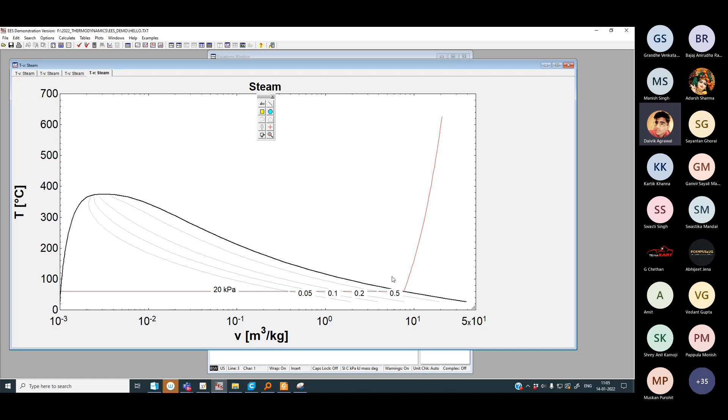Sir, in the TV plot, can we take volume as an independent parameter, because that can help us inside the dome? Can volume and temperature be two independent parameters? Yes, volume and temperature can definitely be two independent parameters. Nothing wrong in that. I had mentioned this also.

So see, quality is also a proxy for volume because once you know the specific volume inside the dome, you can also figure out what the quality is, or vice versa. Once you know what the quality is, you can figure out what the specific volume is.

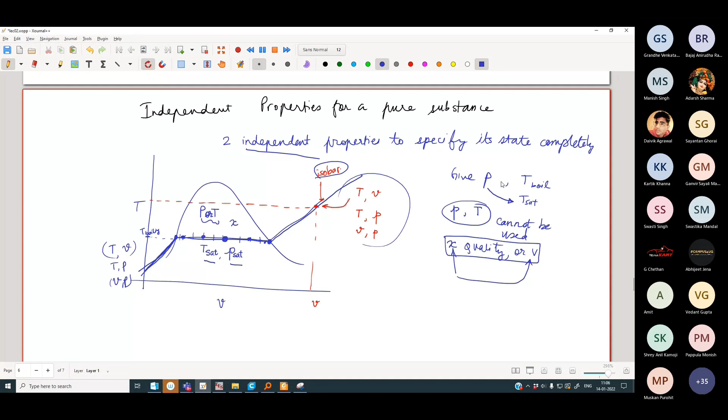Still, we haven't done something very useful. We have not solved problems. That starts on Wednesday.